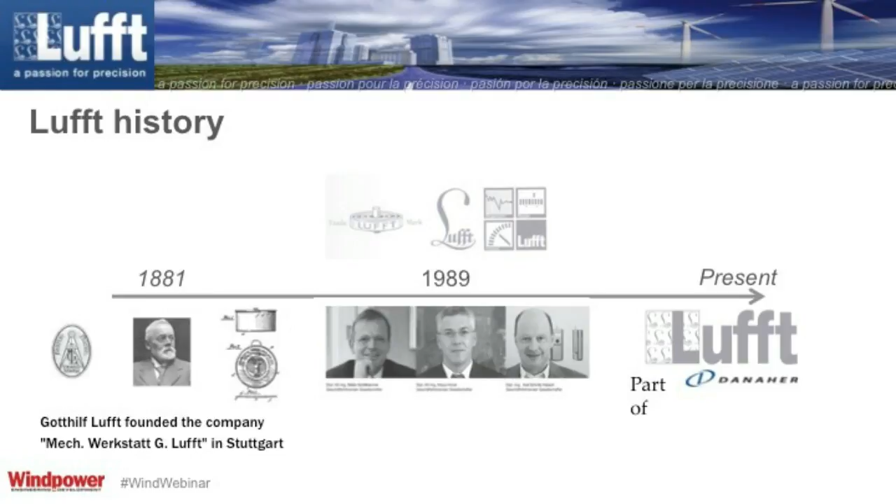Presently, I wanted to let you know a little bit more as to where we've come from in the last 130 years of doing business. We are now part of the Danaher Group, which is a $20 billion organization, and we're ranging everything in the globe when it comes to weather information systems as well as industrial components. As far as where we are in regards to the world, Fellbach is the headquarters for Lufft. We are based in the middle between Frankfurt and Munich, and we also have subsidiaries in the United States as well as in China. I myself am based out of the LA branch, or the Santa Barbara office, which is on the southern coast of California.

In 1903, Lufft became a market leader in the metal barometer business sector. And presently, we are now involved in a wide array of industries and markets, ranging from industrial devices for laboratories, as well as cabinet control sensors or transportation sensors for data logging capabilities.

We also have a market segment in traffic, where we're focusing on RWIS, which is Road Weather Information Systems, with a lot of the Department of Transportation divisions within the United States and the Americas. We also have a mobile weather sensor that's able to capture real-time weather on a consistent basis and provide that information to the cloud for real-time monitoring.

But for today, we want to focus on the business sector that we cover in regards to wind and weather. Primarily, our biggest focus has been in renewable energy, including solar and wind, and I also cover meteorological, hydrological, and building automation opportunities.

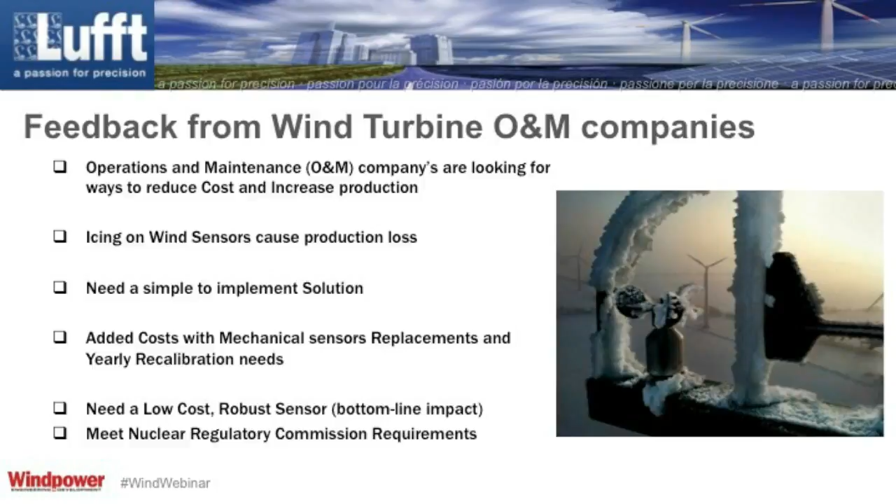The sensor that we provide at Lufft is the Ventus. It's primarily designed for wind turbine applications. Every sensor that we manufacture comes with a factory certificate. And so there really is no need for recalibration because there's no moving parts within the sensor. It's an ultrasonic sensor, so there are no mechanical components to it.

The sensor has dual heaters that prevent icing from forming and also prevent riming. There's a heater on the top of the sensor, the plate there, and then there are heaters embedded within the ultrasonic sensors to prevent any ice from accumulating.

The sensor by itself has both digital and analog outputs, so that helps with the simple integration of any wind turbine currently in operation. We did our research, and we actually meet or exceed the NRC Regulatory Guide 1.23 requirements, which is wind direction of plus or minus 2 degrees and wind speed of plus or minus 0.45 miles per hour. This sensor has gone through HALT testing, meaning that our MTBF at 20 degrees Celsius is 22 years.

The corrosion test that we've provided has passed, and we also have done vibration testing on this sensor. There's also been an ice free testing. As you can see here in the picture, ice accumulated around the sensor, but no ice or ice particulate actually accumulated within the sensor head. And this sensor is an IP66 sensor.

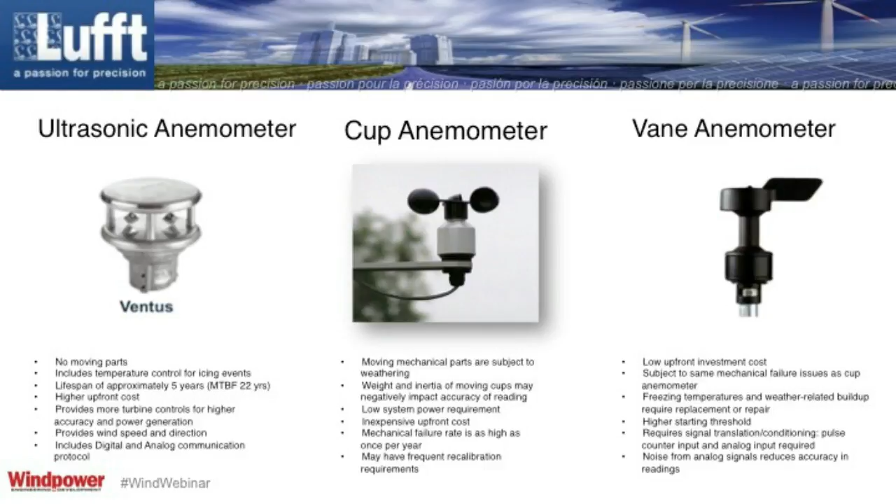Other assumptions for this analysis: we conducted interviews, and within those interviews we were informed that about 40% of all mechanical sensors needed annual replacements due to failure. We did our research and found that on average, wind turbine technicians make about $23.46 per hour. This is added into our labor cost. There was a 5-hour maintenance time to repair or replace the mechanical sensor. This 5 hours is for the labor cost of getting a technician out to the site to repair or replace the mechanical sensor.

Like I mentioned before, signal conditioning as well as additional wiring are additional costs for mechanical units in some situations. And industry reports that icing occurs about 5 times per year. So we assume that if a farm has 100 turbines, then the probability of icing occurring is about 5%. And the information gathered informed us that about $40 an hour is lost in production when a mechanical sensor is down. We also assumed that it would take about 2 weeks for the sensor to be repaired in the field. So we took that into the analysis.

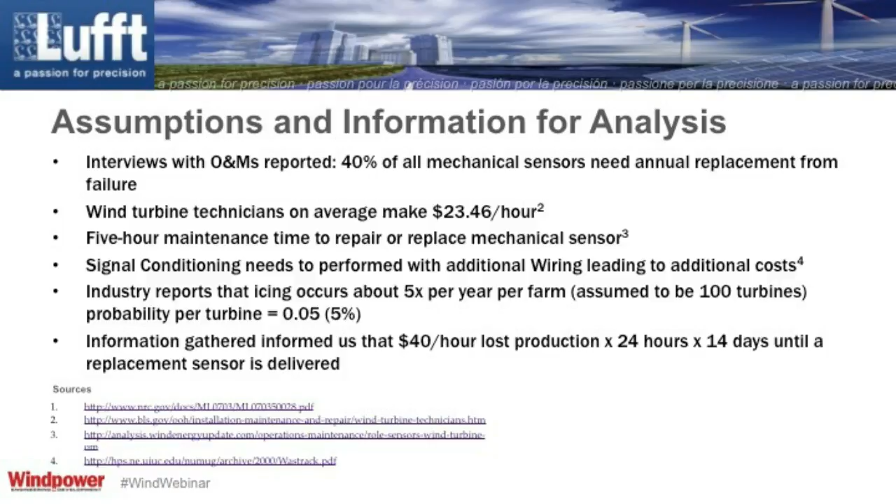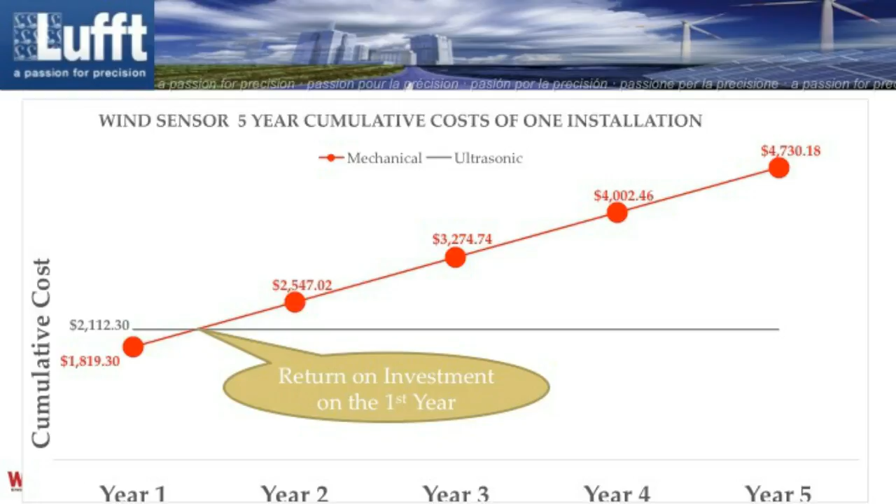Now, if you look at the total overall cost within 5 years, again, the assumption is that both sensors are being compared on a 5-year timeline. The cumulative cost of owning a mechanical non-heated anemometer is about $4,730. And this cost assumes a 40% replacement need due to failure within the mechanical anemometer.

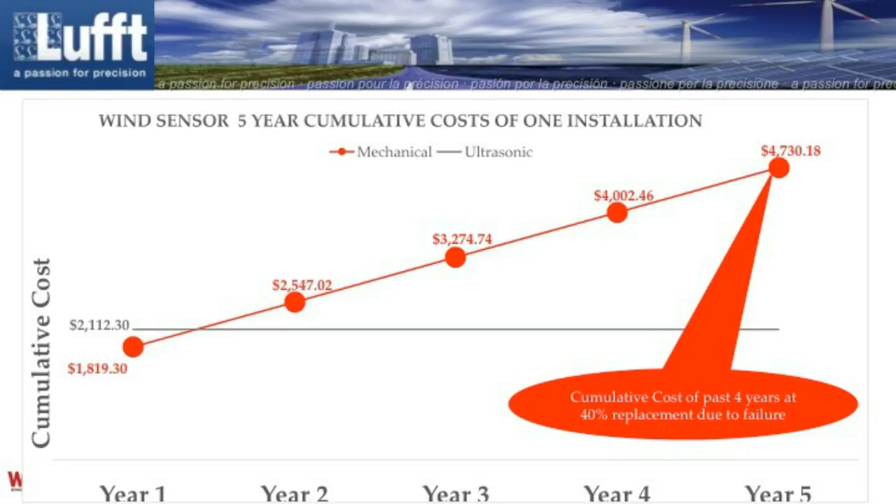This is how we calculated the $1,819 for the mechanical sensor. We took the base price of the mechanical sensor and added the shipping cost of $50. The labor cost, like I mentioned before, is $23.46 per technician per hour at 5 hours. The cost of failure is $40, which is the cost per hour of lost production, times 5 hours to repair, times 40% annual replacement due to failure.

For this particular situation, we added in the signal conditioning requirements that would be needed for a mechanical sensor and the additional wiring costs required for the mechanical sensors to operate. And we also incorporated the cost due to icing, which is $40 of production lost times 24 hours times 14 days until a replacement is placed, times the probability of icing of 5%, which accumulated to $1,819.

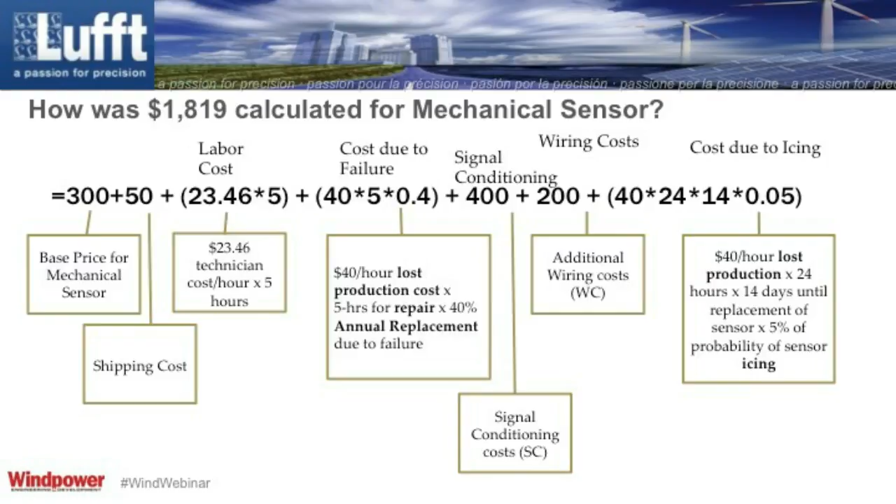Now, someone might say, well, in my case, I don't have any signal conditioning or additional wiring costs, so what would the cost look like? Well, in that case, if we take away the signal conditioning and wiring cost, the total cost of owning a mechanical sensor is $1,219, as you see illustrated here.

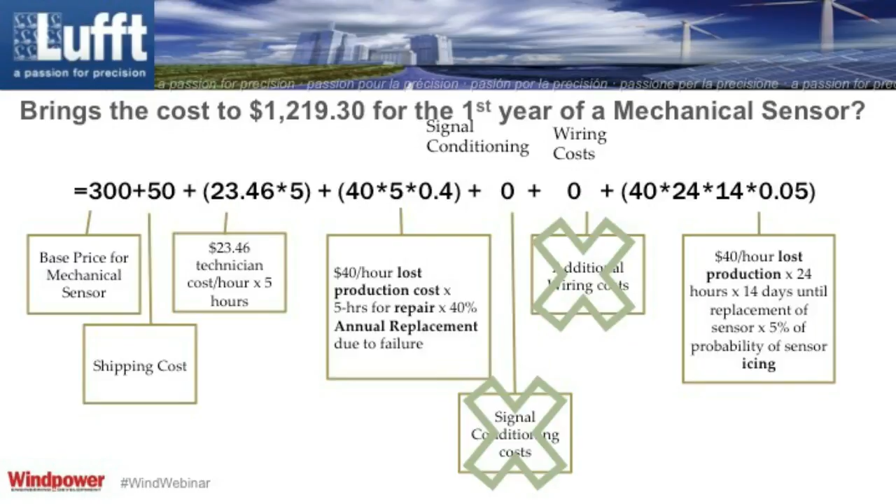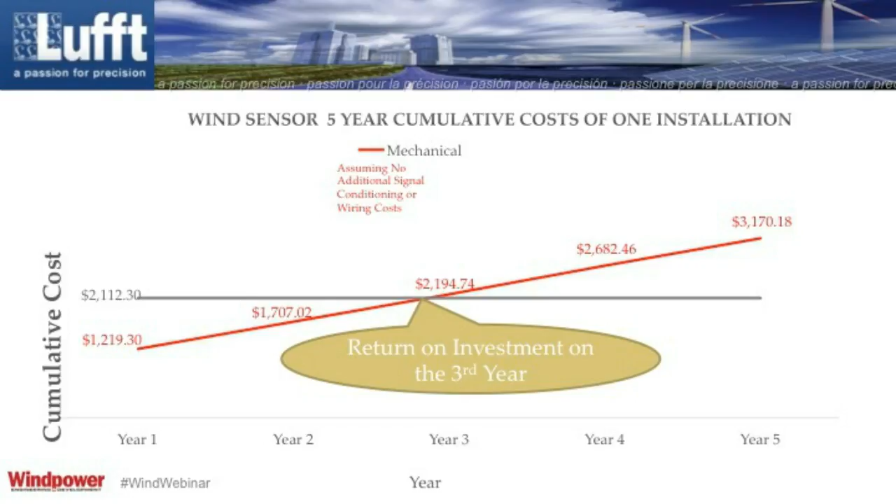What does this do to our graph? It shows that if no signal conditioning or wiring costs are included, the return on investment for owning a mechanical sensor compared to an ultrasonic is a 3-year return on investment, as you can see clearly on the graph.

Now, how do we calculate the cost of the Ventus ultrasonic anemometer? The cost of $2,112 was looking at the base price of $1,945 for the Ventus. There's a shipping cost of $50 that we assumed, and $23.46 for the technician times 5 hours to go up and replace the sensor.

Now, because of the ultrasonic, we are not expecting to see any failure from the ultrasonic, or any signal conditioning, wiring cost, or cost due to icing; that would be eliminated within the total accumulation of the total cost of owning an ultrasonic sensor.

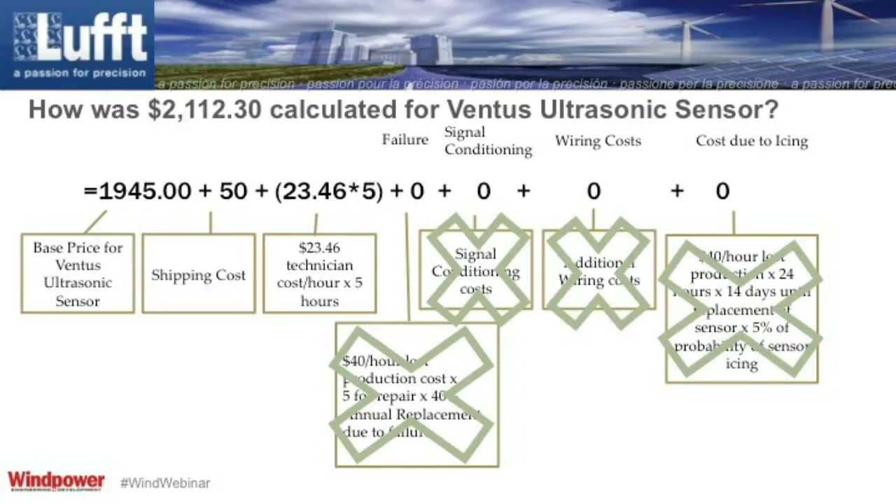Now, we also did an analysis identifying what the cost would be if we owned a mechanical heated anemometer, and the cost for this is actually higher compared to an ultrasonic sensor, where the cost of an anemometer that's heated is about $900. And when we looked into each individual item, it came out to $2,419 compared to the ultrasonic that's only $2,112.

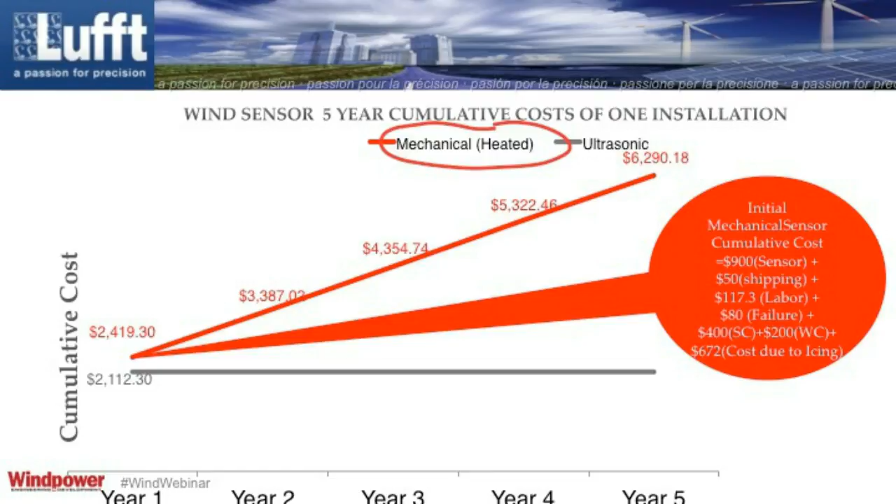Now, if we removed the cost of icing or the cost of additional wiring as well as signal conditioning, you could see that the cost of the mechanical heated anemometer dropped significantly to $1,147. However, the return on investment over the lifespan of the sensor could be within 3 years, as you can see illustrated here in the graph. After a certain amount of time, the accumulation of failures just keeps on increasing the cost of ownership of a mechanical heated anemometer.

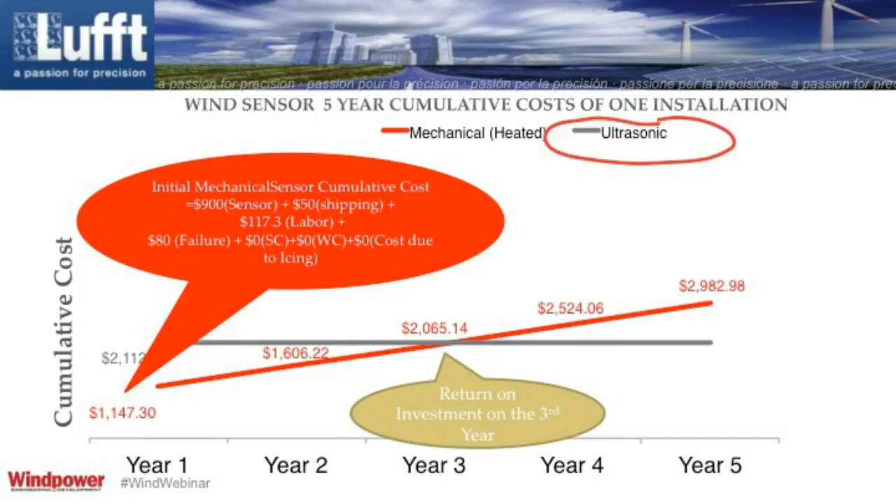This graph shows if we were to incorporate the cost of icing in the mechanical heated anemometer. The reason for this is because we've heard within the market space that even though they're owning heated anemometers, there tends to be icing formation causing failure points within these sensors.

So if we took into account the cost of icing due to production loss, the cost actually comes out the same as if both the heated and the mechanical non-heated were incorporated. So the cost comes out to $1,819. So again, the return on investment could be simply within a year of purchase compared to the ultrasonic anemometer.

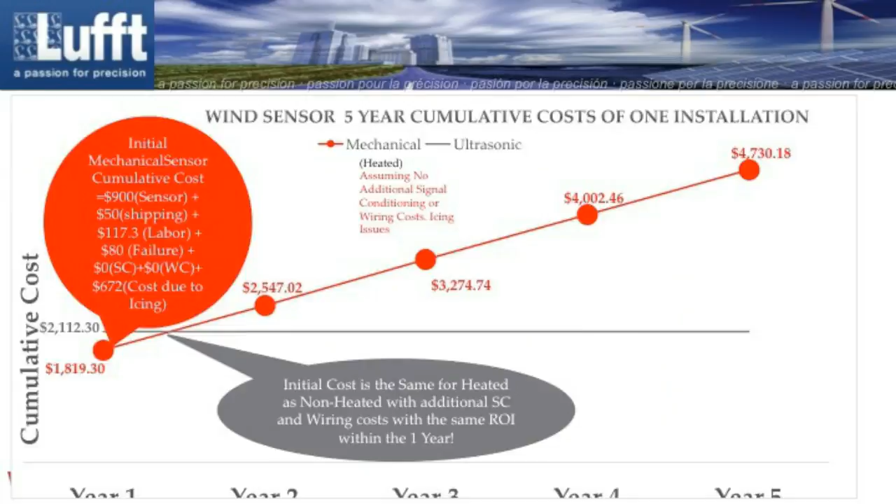What we really wanted to highlight in this slide is that icing is a really big cost adder in regards to the ownership of mechanical sensors. As you can see here in the first column, this is a column illustrating mechanical sensors that are non-heated. And the total cost within a 5-year timeline of owning a non-heated mechanical anemometer is 53% due to icing.

For the second column, we didn't illustrate icing because we said, well, if the mechanical sensor is heated, then you won't have that additional cost. But as you can tell, because of the failure points that tend to occur, it's definitely more expensive, or double the cost compared to an ultrasonic.

And of course, with the mechanical with communication protocol, you would remove the cost of signal conditioning or additional wiring, but there's still about 48% of the cost due to icing. Again, these additional costs are not incorporated within the ultrasonic because there are no signal conditioning or icing issues that could occur.

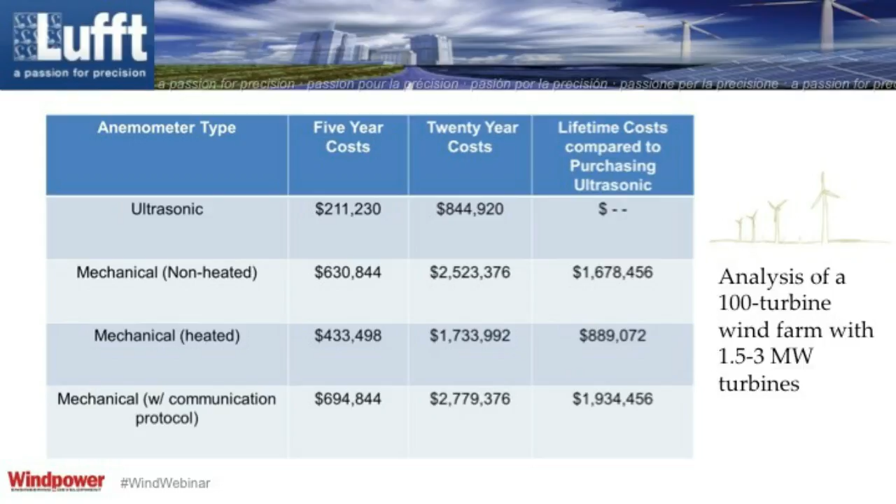And when we did this correlation across all the other ones, you can tell that owning a heated or non-heated mechanical anemometer over its lifespan is almost twice the cost of owning an ultrasonic. So we recommend going with an ultrasonic anemometer just because of the cost savings you could incur by going with one of our sensors.

So don't take our word for it. We've worked with other O&Ms. Like I mentioned, we also have a representative from AES on the call. AES has incorporated our product offering for their wind turbines, replacing a lot of mechanical anemometers with our Ventus platform. Terra-Gen is another O&M company we've worked with that is doing the same. And we also have OEMs like WEG and Goldwind who are using our Ventus and have standardized on our product offering because they also see the benefits of our technology.

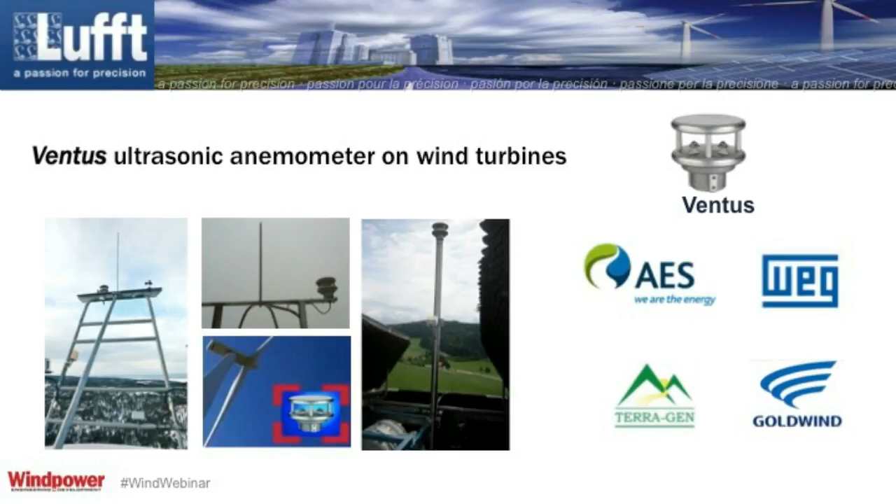Now, what we're asking for you is to look at your current wind farm and identify where our potential technology would be most ideal for your installations. We understand that there's about 48,000 installations out there, and we feel that there's a need for our technology to be incorporated within the American wind energy industry.